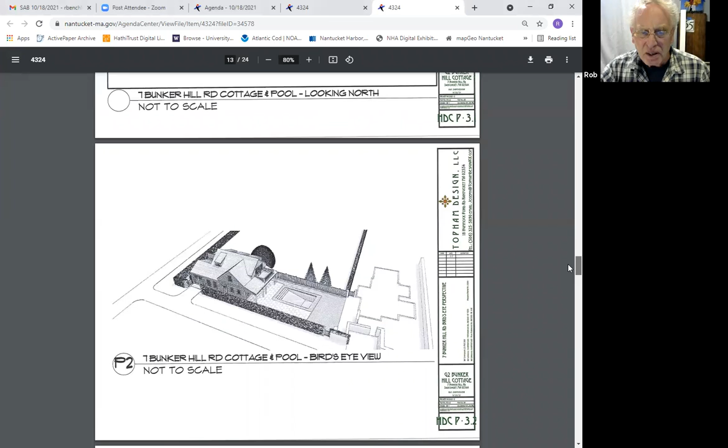This is what was the barn and is no longer, and has now been very much redone. I had to rotate this whole thing because all the other drawings are going the other way. So if you need to see that, Rob. Yeah, it's all right, that's the way it fits on there.

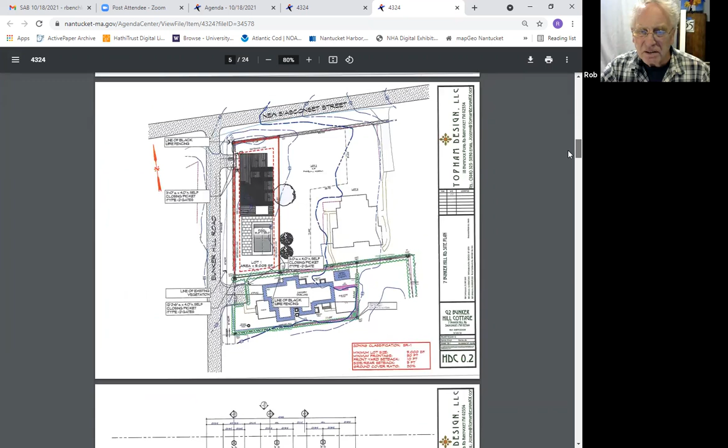Out of curiosity, what is the percentage of increase to the square footage of this house as compared to the house that we've previously been considering? Hold on one second.

It looks pretty similar. On the first floor, we added 340 square feet. So what we've done, if you go back to the first floor, Rob, please, we included a bedroom where before the structure didn't have a bedroom.

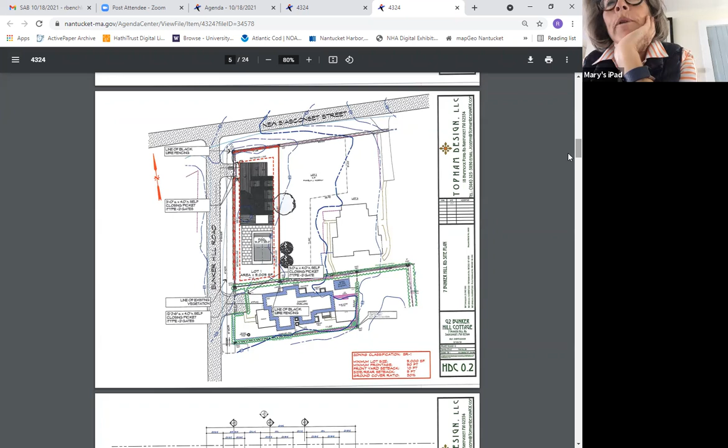So it went from a no bedroom house to a 3-bedroom house? No, it had a bedroom on the second floor, and now we've added 2 more bedrooms to the structure. And that changed it from a single story to a story and a half.

And what we did is, instead of having the gable like we had before closest to the street, we moved it to the east side of the lot. And we only raised that gable by 3.5 feet from the existing structure's height of the barn.

I saw an indication that it was 5 feet higher. I'm just saying from the gable facing the street and the west elevation, that's 3.5 feet taller than the old 1850s barn. But yes, overall, you are correct, that main ridge is 5 feet.

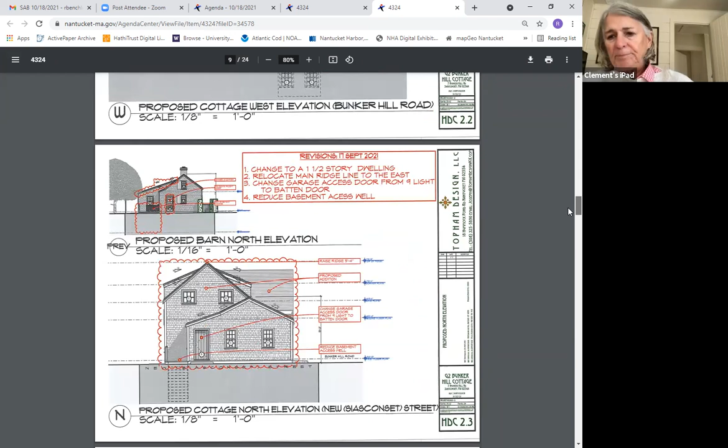And that's why we pushed that to the east, so as far back as possible from Bunker Hill Road. No, I think that's an improvement. Yes. But overall, it's what, 20, 23 something? Yeah, yes, correct. Yep, okay.

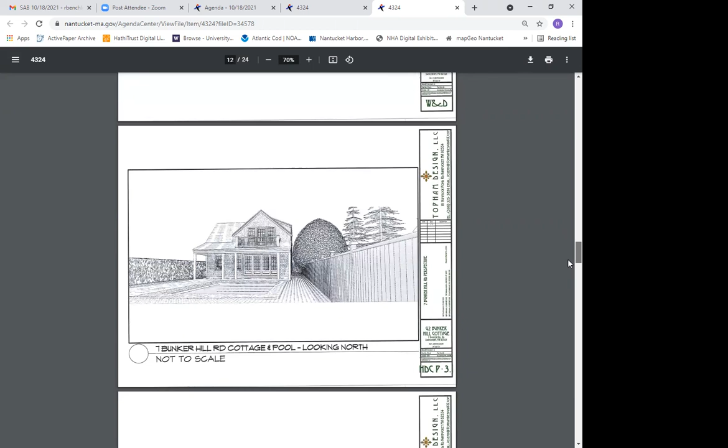And what I wanted to do is, you know, the owners do own next door, but make this the cottage and try and stay within the 22, 23 foot height. Just going forward, even though it's on its own independent lot, I wanted it to look more like a cottage to the main house. And on that bird's eye view, you can see the foundation of their main house.

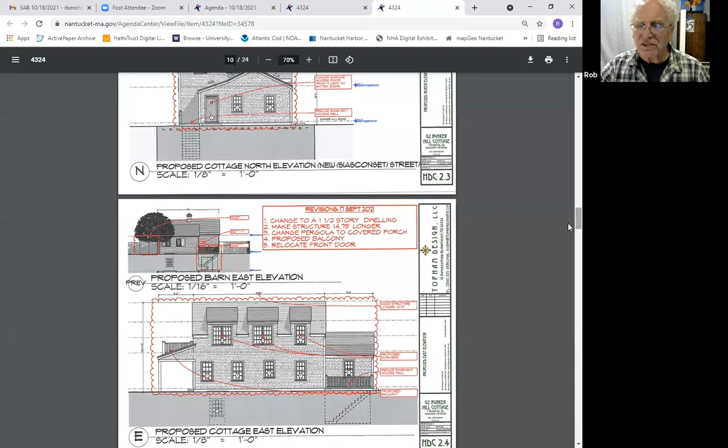Yes, perfect. And so that's, oh, that's the east. Okay, so that's not facing the street, that's in the back. Interesting. Right, that's facing the fence, which has gone up. How far from the fence is this? Just 5 feet, I would assume? 6.

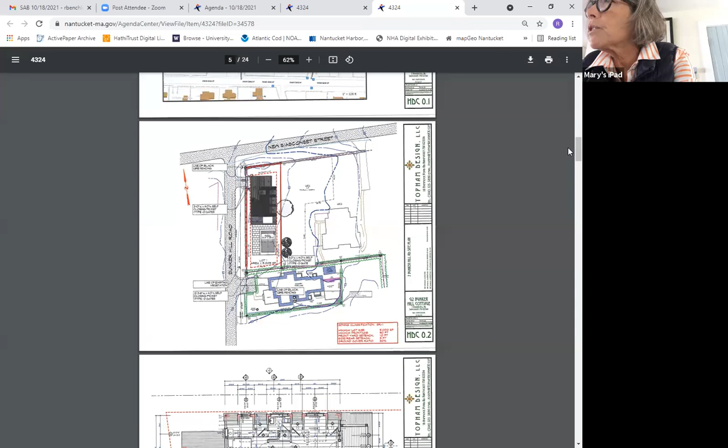Uh-oh. A standard stairwell is about 3 feet, and you've got the stairs going down to the basement. So at one point, there's a passageway between the basement stairs and the fence that's probably 3 feet wide. Correct. And we had that large area well, and we made it much smaller, just an access stairway, so they can get furniture or bikes, winter storage.

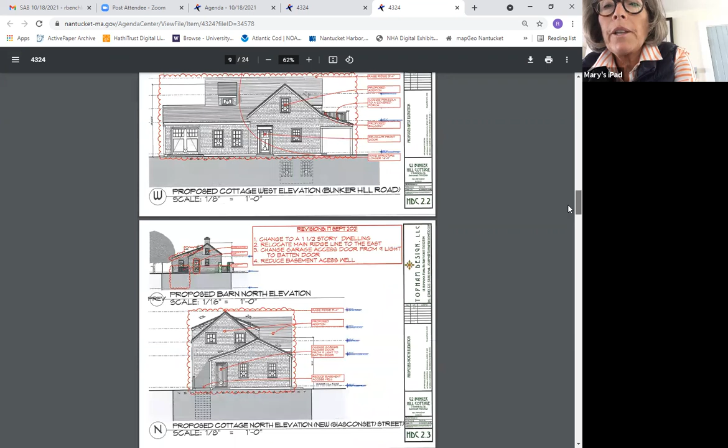Right, so 3 feet at least. Correct. Well, I do like having the access stairwell on the east side. That is preferable, but it looks to me as if you've got egress windows on the west side. So in fact, at some point, they could have bedrooms in the basement, I would assume.

Yeah, so we're not sure what we're going to do, but I always like to add egress windows, whether it's a playroom or a rec room. Right now I have swings set up in my basement for my daughters to play, but I always want a second means of egress. I don't know if it's a fatherly thing, but it's just something I always like to do in basements, even if they're not going to be used for bedrooms or some program. I'd like to have a second means of egress out of a basement.

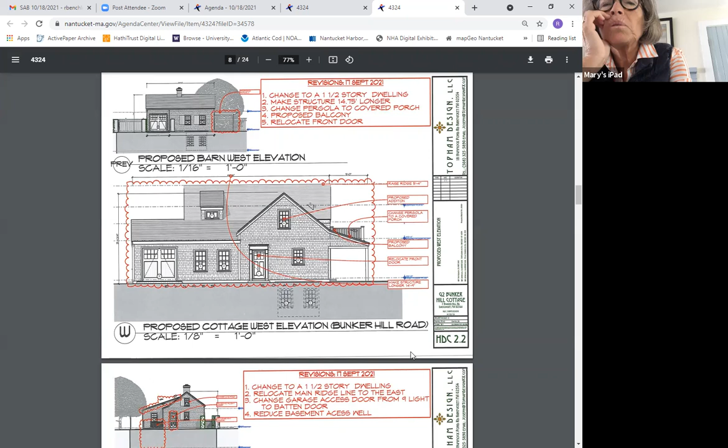Right, good idea. I had a friend on Center Street pass away because he couldn't get out of a basement, and this was in '85. Oh, that's awful. Yeah. And how deep is this basement? 12 feet? No, 9, 10 foot. Okay.

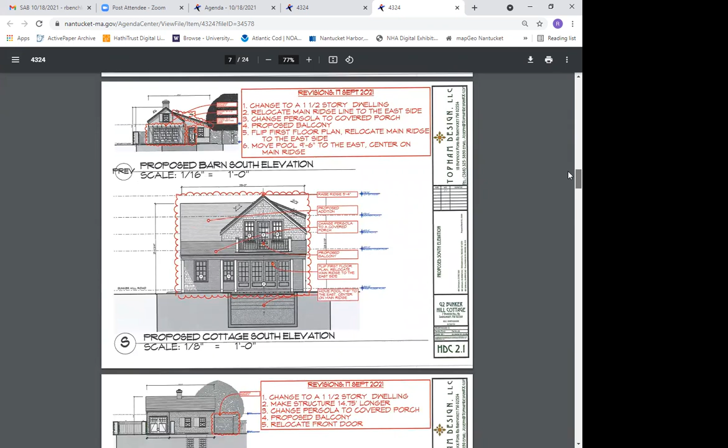Anybody have any comments? I feel like this is a nice compact treatment. I'm just absorbing it all. Yeah.

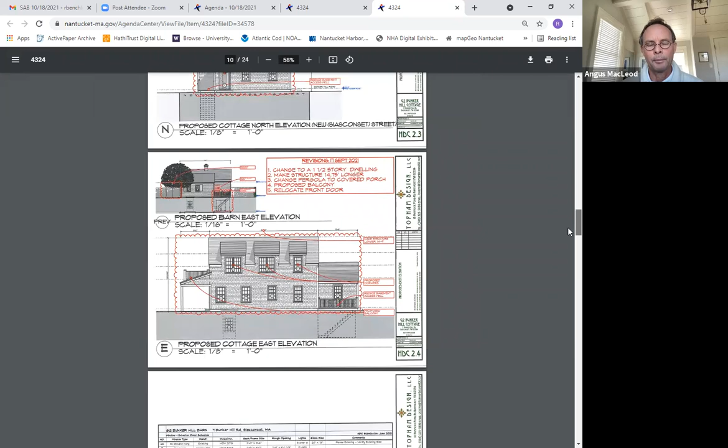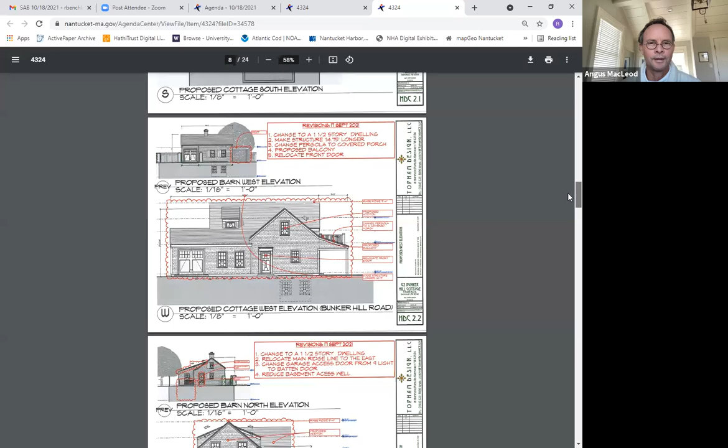So start off with the idea of a moved barn. And the low eave and the garage doors sort of fit with the barn idea, and it being close to the street. As soon as the gable goes in and the front door goes in, then it's making me think this is the facade, and there's a garage door flush with it, which isn't jiving for me.

I feel like there are conflicted thoughts here: is it a garage, is it a barn, is it a house? Certainly on a barn, there wouldn't be a balcony and all the French doors. And I guess my concern is that it's so close to the street, there just isn't any buffer. I wouldn't ever put a window well on the street side.

I like that the stair has moved around to the back. I think that was one of our recommendations. I like that the higher mass is pushed back. I think that's a good idea, but the reverse gable that comes forward is, I think, imposing that close to the street. I'd almost rather the parallel gable be closer to the street so that the eave is lower on the street.

But I guess the biggest thing for me is really the conflict of house or barn, garage door next to front door, and the sort of freestandingness of the porch roof with the balcony and all the French doors and the folding doors.

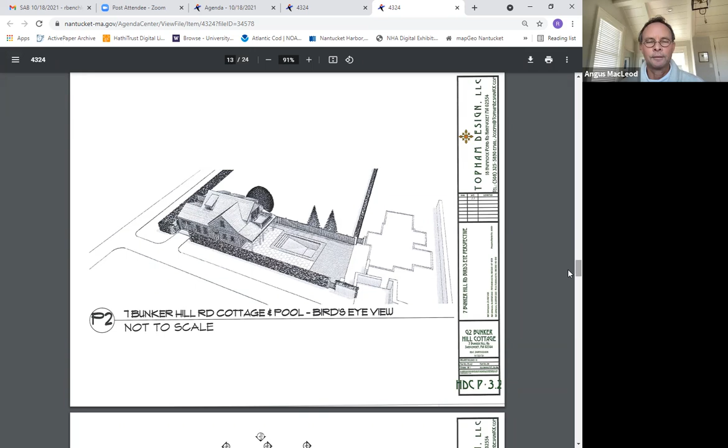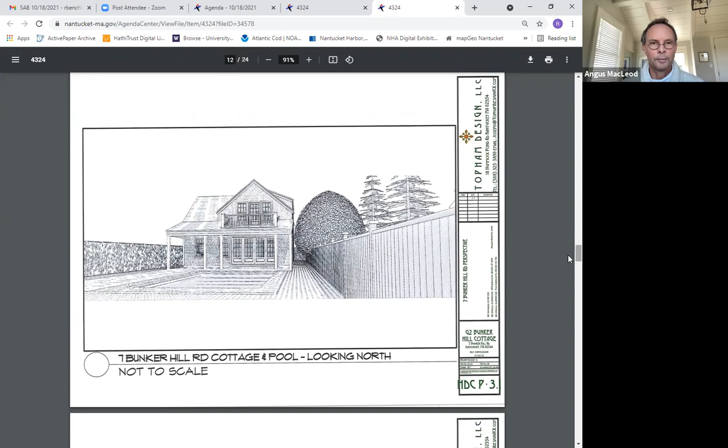That's tricky with the hedge, even if you've got a 6 foot wide or thick hedge, that loses leaves. And this is what you'll see unless there's a board fence in that front separation from the street, you'll see the French doors, you'll see the pool, and the open balcony.

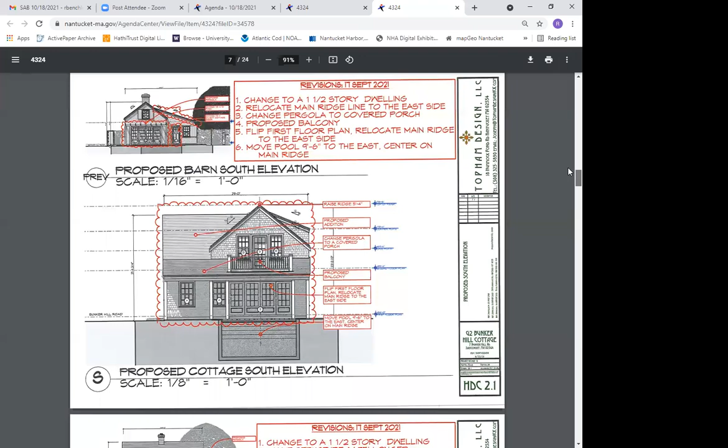So those are red flags for me, as far as guidelines. Mr. Chair, one second. I have to provide evergreens along Bunker Hill all along so that if the leaves drop, there'll still be evergreens on the inside of the lot. So privet to the street side and evergreens on the inside, so it will be screened into perpetuity. Okay, you've got room for evergreens.

This is Clement. This feels like this is not really a pool house. It is definitely a cottage. I think you're trying to say it's a secondary dwelling, but it certainly feels to me like a whole house going on that lot, which it is. I mean, it's got everything a house has: 3 bedrooms, garage.

I agree with Angus that it seems to be a hodgepodge. You can't decide if you're a pool house or a guest house or a garage. You're everything all in one. And I once again feel as if we could possibly get pools covered in the square footage, this would be much too much for that lot.

I assume you've done all how big your house can be versus a lot, but it's a lot of house to me. It does not seem secondary to the main dwelling, or secondary to the dwelling next to it. So it seems like a major house right there on the corner, and not just one road, 2 roads, because it's a corner. That's a lot to be seen from both Bunker Hill and New Street. Okay.

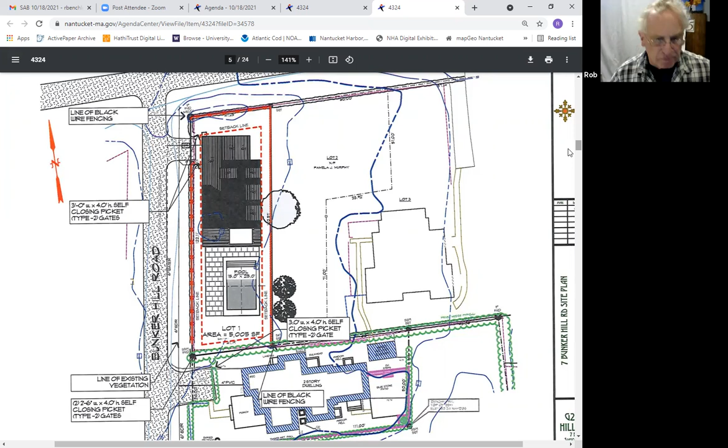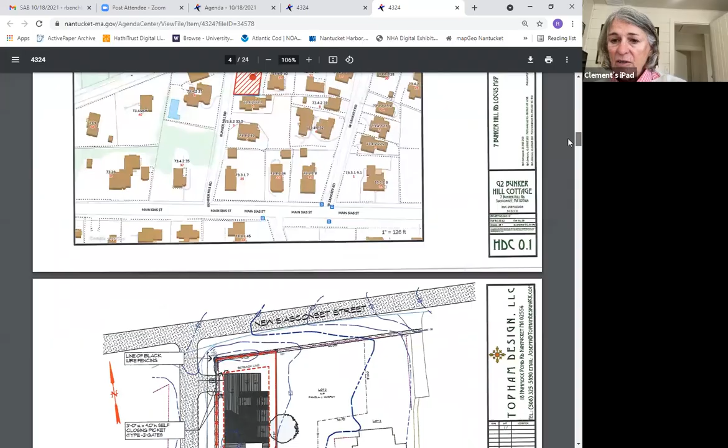And I think we also talked about the picket fence, because there's a closing picket type 2-gate fence right at the garage entrance. We also talked about they're putting wire fencing all around the property, in addition to the hedge and the evergreens. Correct. Speaking of fences, I'm not seeing a break for the front door, how that works.

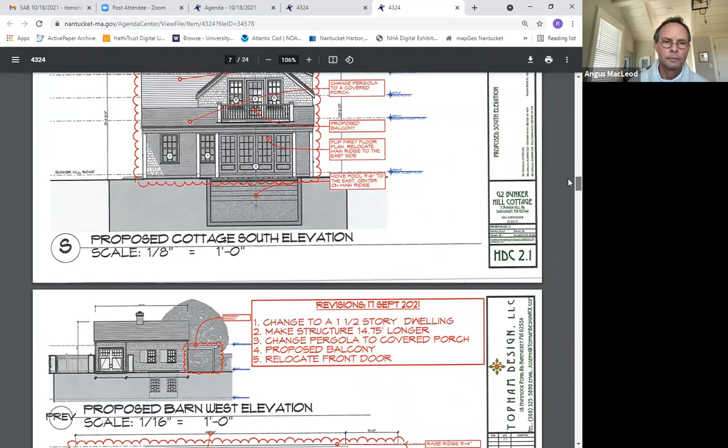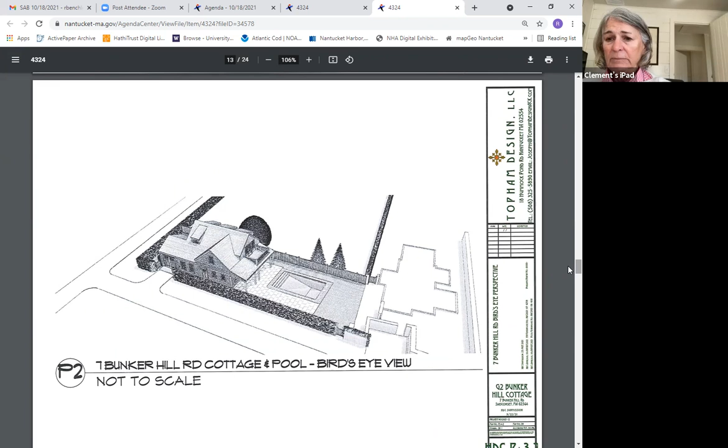Maybe that's because the front door really faces the pool, and this door is not really a front door. Which is why we're confused about this little building. John McLaughlin likes to have a door face a street, so that's for John McLaughlin and the HDC. I understand what you guys are saying, but that is why that was introduced on that elevation.

Is there not a break in the hedge or a path to the door? It's by the garage door, but we could put a gate there if that's what you want. But right now, 90% of the traffic would be coming from the parking area and then traversing into the house that way. That's the way the owners want to use the house.

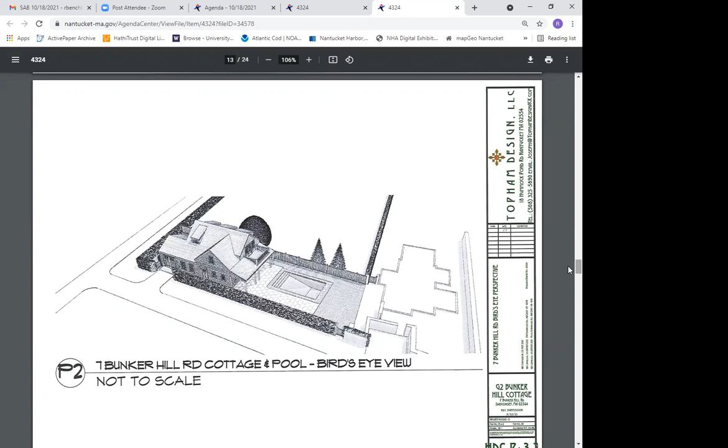But I was just on Back Street in downtown Nantucket, and there was a door, and you walked 20 feet down parallel to the street to get to the front door. There was no direct access gate. And right across the street, there was another one, and I was looking at another one with Linda Williams, and I came up with the street address. So it is not a typical feature on Nantucket, but it is a feature on Nantucket, so I didn't feel like it was out of place.

I didn't know whether that was just something that didn't happen in the drawing, or if it really was that you would go alongside between the hedge and the house to get to the front door. Yeah, that's the way my clients want to use it.

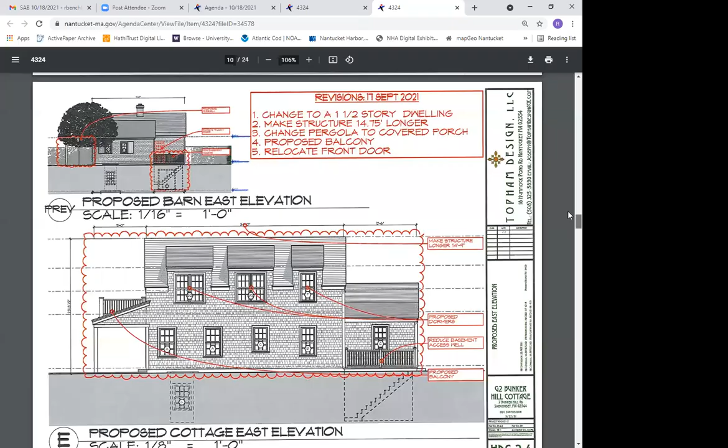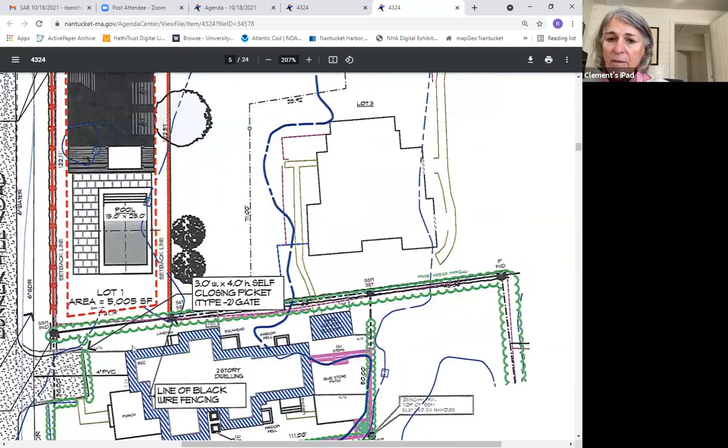There is another fence I just saw that's right on Bunker Hill, right at the edge of both properties. There's a little gate. Correct, on the south side of the pool. On the other side, right there. Little gate. And I know that there is some connection between the two houses. There's an opening even right now that goes between the houses, but I don't see that on this plot.

I think you have an old site plan because there was a gate there. Sorry, my apologies.

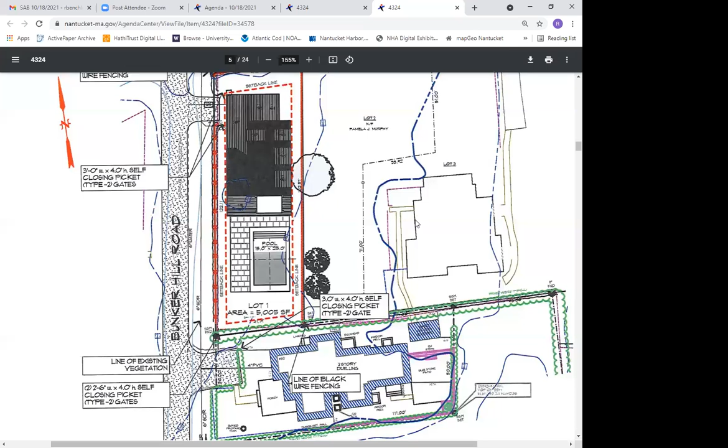Oh, wait, I should ask Caroline where the pool equipment is. Caroline's not here, right. Where is it? So I should just stand in for her and ask, where's the pool equipment? Another question, thank you. Seeing okay, I will put that in the notes.

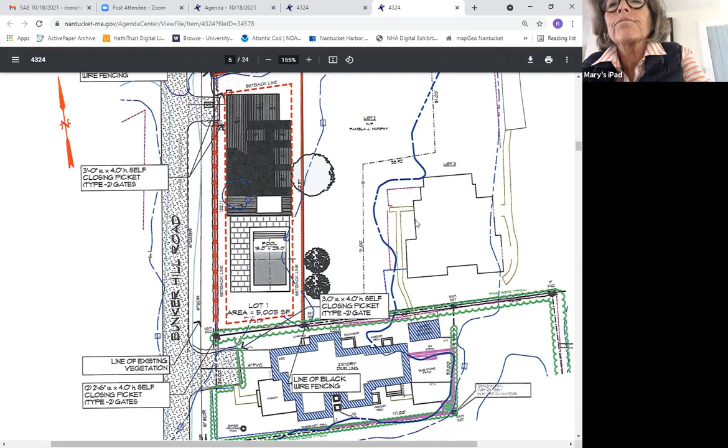There might be just enough room on the 6-foot side between the hardboard fence and the side of the house, the living room side.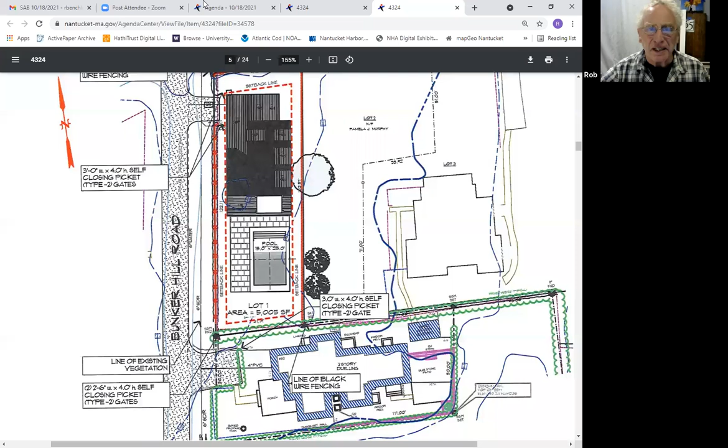Oh, yeah, this is back to the Pinsons. We looked at this, what, a year ago almost? Yeah, longer than that. And I think it was longer because I have never seen this before. So when it said it was approved, I had never seen it.

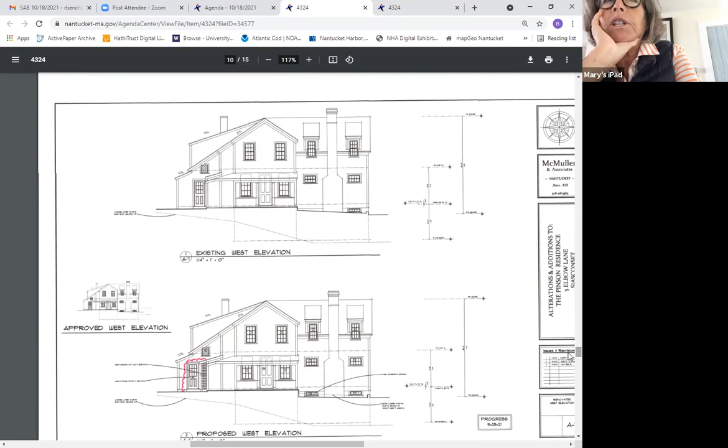A long time ago, they were basically developing a basement and then changing the deck structure on the outside a bit. I think it's a more subtle deck structure now than that which exists, and they're getting rid of that huge stairway, the long stairway that goes to the east. I think it's just a vast improvement to eliminate that, I agree.

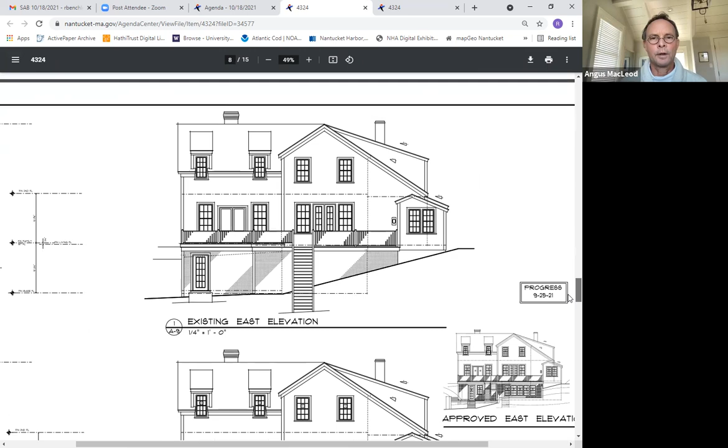Yeah, to make it more compact and sort of in the corner of the two decks, the east deck and the southeast deck. It's much more subtle. They're getting good space under the house, and they're making use of the bank in a more subtle treatment. The house will look less, yeah.

It's more compact. And so I believe, this is Rob, I believe this is primarily just windows.

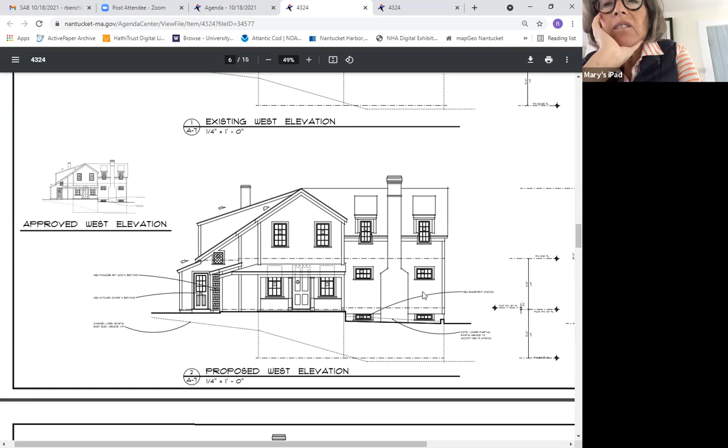Right now is this little powder room they want to put on. Oh yeah, that's fine, I don't think that changes much. And it looks like there's a west elevation already. Oh I see, it just bumps it out a foot and a half or so.

Yeah, and it's inside a gigantic fence. Yeah, you really want to see that.

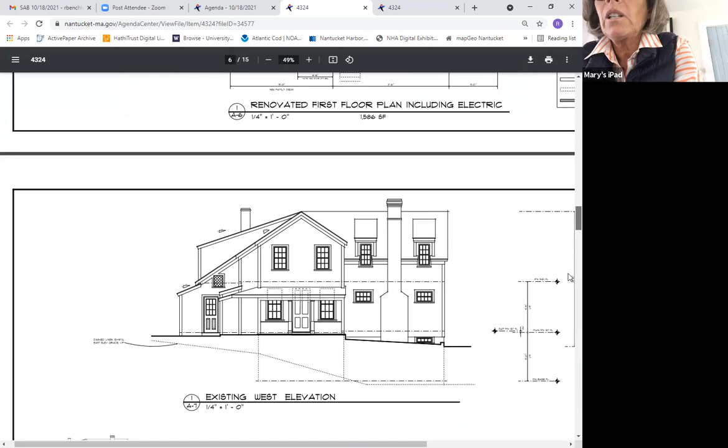It looked to me as if the window changes were changing from double hungs to what exactly? I was unclear, I don't see any - what is that on the application? The reason I'm scrolling all around here, this drawing is really - I mean this application is so big, so I'm trying to avoid...

New 9-light basement door, that's not a big deal. Provide as existing, no.

Huh, I thought it's that - for window changes, at least that's what it looked like on the drawings to me. Looked like they were getting rid of the double hungs for a different form of window. Well, let's take a look at the window schedule.

It's... I didn't want to be doing this because of what's happening right now. Oh, because once you move it, then it starts squirreling all over the place?

Yeah, well they've got double windows now, and it looks to me on the proposed - well there's... okay, proposed east. No, those are still double hungs.

Yeah, I think it really is just the powder... number 4 window downstairs maybe, or the 9-light door downstairs, which looks fine. Yeah.

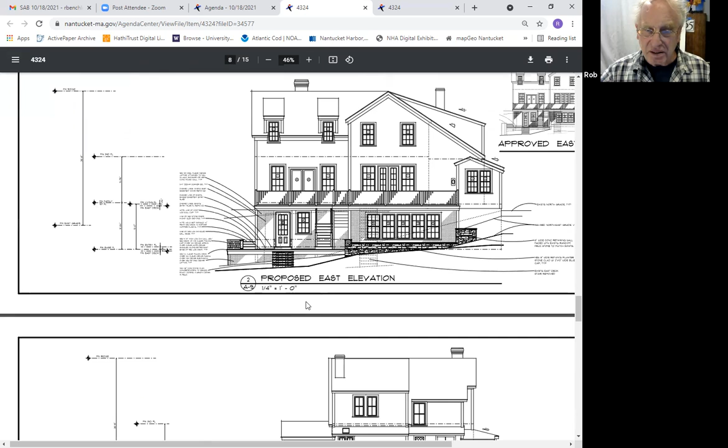It took me a while to find the red circled thing, but that's all I can tell it's on there is that - there it is. See, way down at the bottom.

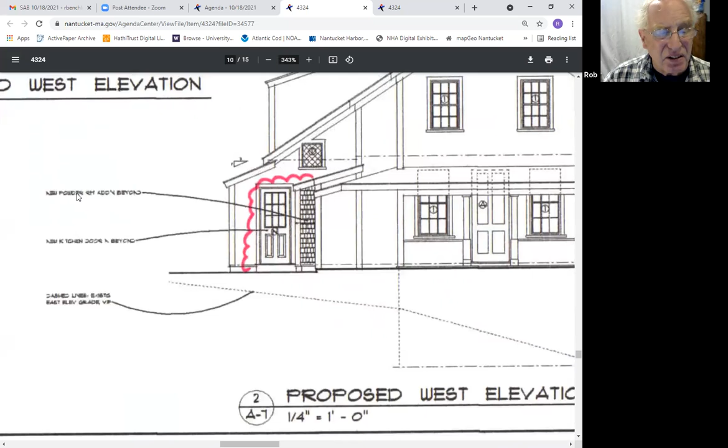That seems - is that door changing it? Or is that just so the red isn't blocking out the view of the door? Well, it does say new kitchen door - room addition, yeah.

But it looks like what's already there, right? Yes, it does. Whoop, stop it.

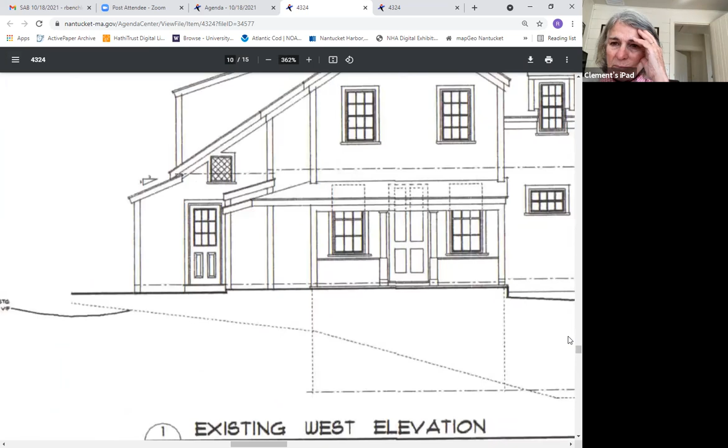Pretty close. Yeah, 9-light with 2 panels is what was already approved, yes, and what's existing.

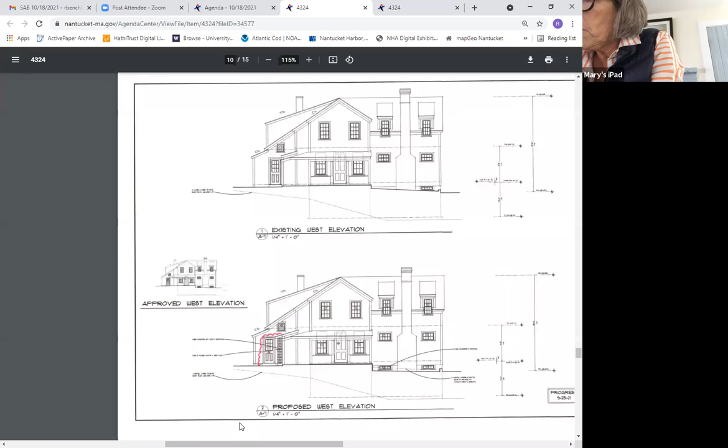So it's just the bump out of that powder room. I don't have any concerns with this. I think it's actually an improvement. I do too. I don't have any concerns either, but...

All right, there it is right there. So right here is the existing wall. See where the cursor's doing that thing? And then they're gonna bump it out here.

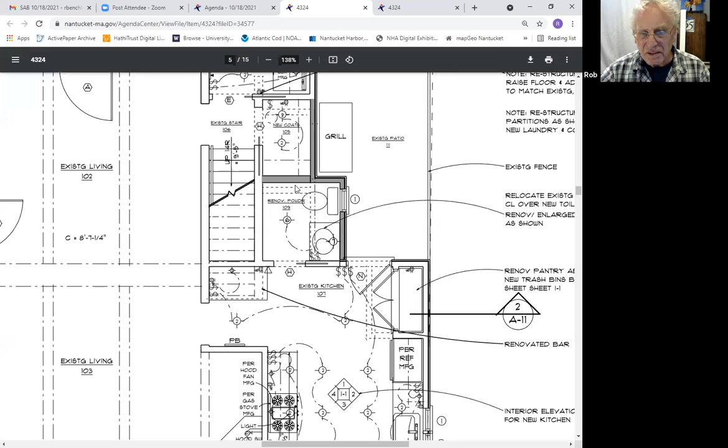Good, what a good idea. Yeah. Quite a project.

All right, I can find the agenda. We can move to our next item, which is - let's see, this is everything that's on the agenda, and we...

There's a zoning article that's being developed, I believe, for Sconset. Clement may know more about it, but it basically is taking the planning board and approached the Sconset Trust some ideas about...

Restricting the building height in some of our central zoning districts to 25 feet.

I think the area plan recommendation was for 24, but planning board said 25 is sort of their typical number. And the trust wanted to, and I think we should have some input on it to discuss what...

...we think, which districts would be 25. Would it be in a special overlay district? Would it be in R1 only? Would it be, or SOH1?

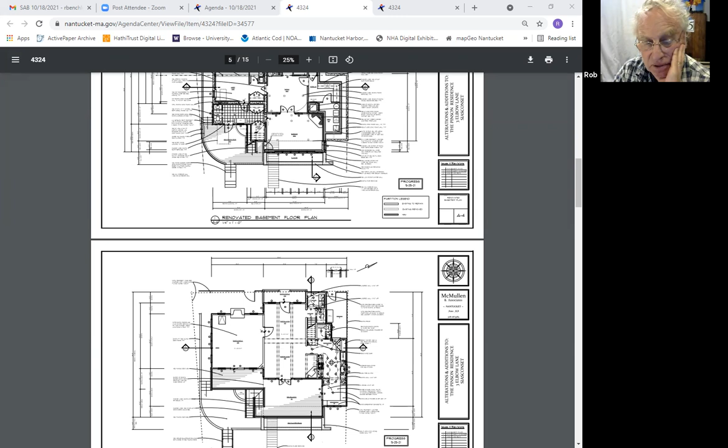When you do - and I'll just start off by saying, when you do a change like this, you get reaction right away, and people try to get in under the wire and build a 30-foot house in a place you were trying to not have a 30-foot house.

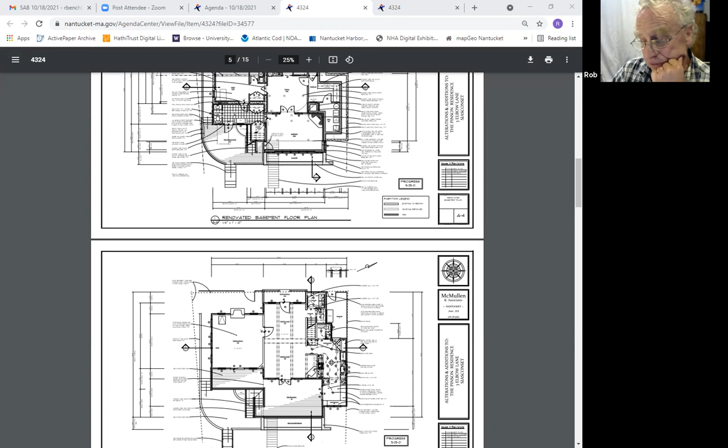Mhm. And also, that might - in terms of Codfish Park, maybe we could exclude Codfish Park from that, if there's a way to do it. I would hate to think that 25 feet would be, quote, allowable in Codfish Park, and we...

...could be shooting ourselves in the foot. So just some things to think about.

And I've been trying to find the core zoning map, and I haven't been able to come up with it to make it work here, but does anybody have any thoughts about this?

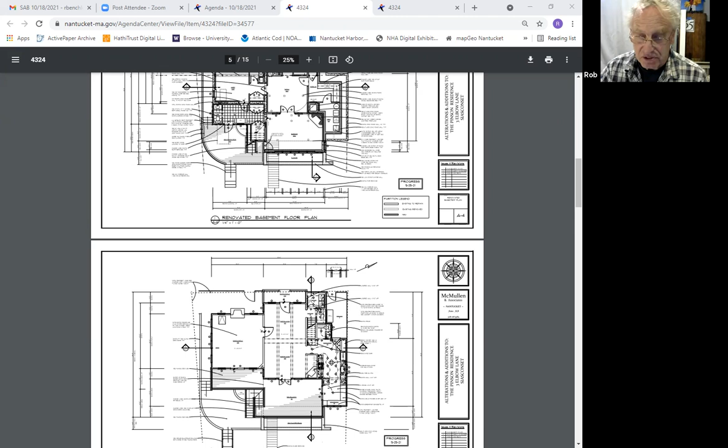Currently the ridge height is 30 feet, and of course the HDC and the SAB and most area plans, most neighborhood advisory boards, the 30 foot is the real limit, but it's taken on a case by case basis. So I think the HDC has been put in a difficult position many times because of the 30-foot limit, when most of the time 25 or less is more appropriate.

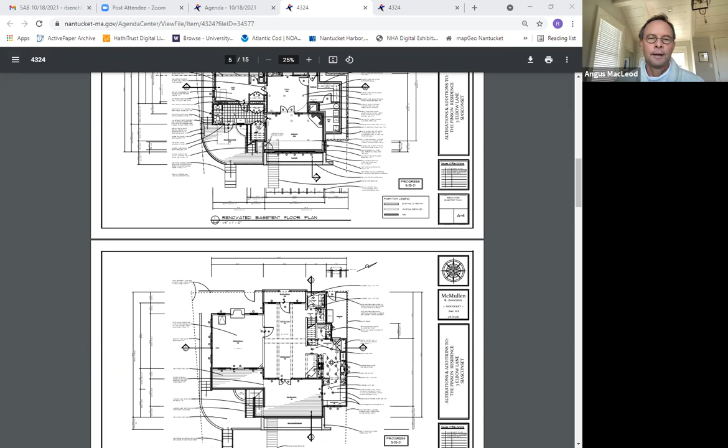So I'm certainly in favor of lowering that height. It's up to us to advise the HDC when something isn't appropriate for 30 feet, and then it's the HDC's responsibility to decide whether zoning is allowable in that area, or if it's more appropriate to have something less than 30 feet. But unless it's some very large building or old hotel or something, 30 feet feels large for Sconset. So I'd certainly be in favor of that.

A little bit of background on this: the trust was approached by planning and zoning committees. They want to do a warrant establishing these heights, and they wanted support from the community, from the civic association and the trust. It does seem to me that when you are specifying a height, people would say, oh great, I can go up to that. And the point was 25 in SOH and 30 everywhere else.

We, of course, as we all know, have lots of varying neighborhoods that should not go up to 30 feet. So I don't know what we should say in response to this.

And SOH is Codfish Park now. It is Pochick Street, and you'll remember that the zoning and planning wanted to extend SOH all the way to Burnell Street and Bunker Hill, and get rid of SR1, which was not approved.